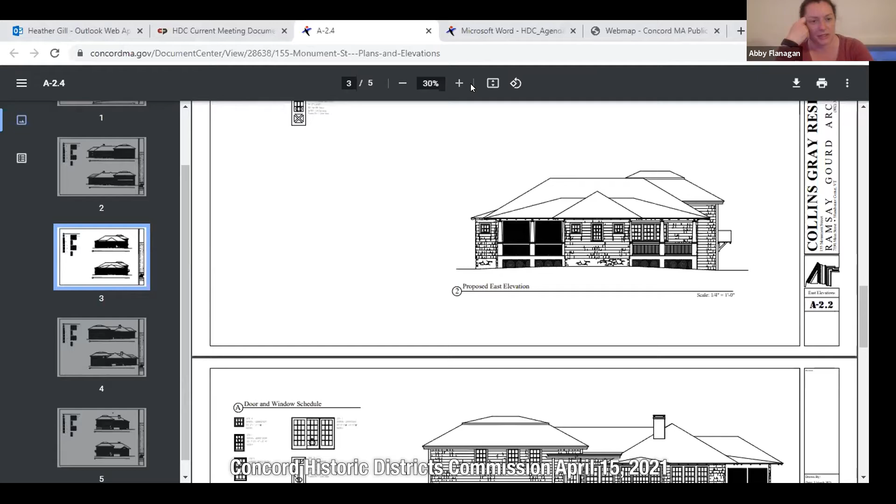Thank you, Luis. Abigail: Heather, could you just pull up the cut sheets on the exterior light fixtures, the one by the front door and the one between the garage doors? I just wanted to double check. Yeah, so they're dark sky compliant. Do you know the wattage and the kelvins on these?

Does it say it on the sheet that I included? There is not one by the front door. Oh, there's no light fixture there. I thought there was, but there's no light fixture. So the only exterior light fixture being added is between the garage doors. And I think there's a recessed one in the porch, recessed in the ceiling above the door to the garage and the front door.

No, there won't be any in the roof. Are you talking about the roof line over the garage doors? No, there won't be any there, just that one light. And you're removing the floodlights that are currently there?

We'll probably replace them with something a little smaller, but we would probably need to light up the driveway in the back. So I would just ask that whatever fixture you choose to replace, since you have an existing floodlight, you're entitled to replace it in kind. I would just ask that you submit that fixture to Heather, and that it's of no greater wattage than what's currently there. Yeah, definitely.

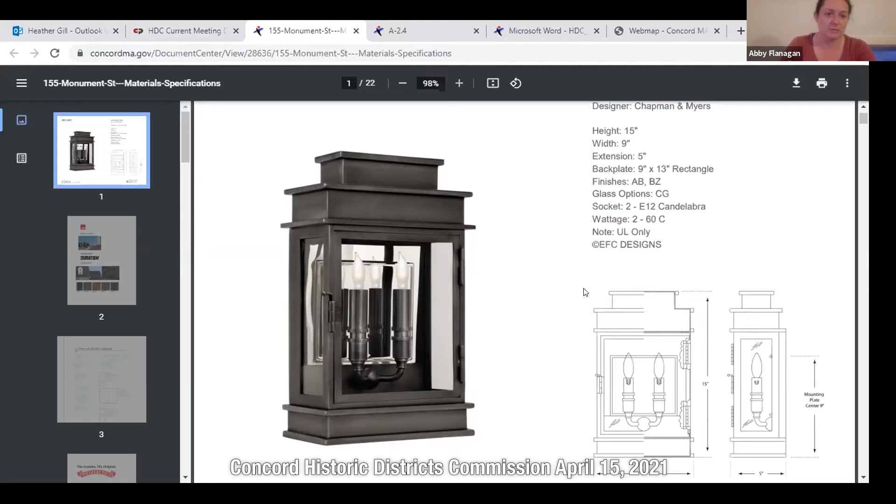Other than that, I didn't have any issue with the application. I think it's appropriate, in keeping with the architectural style of the house. I think it'll be an improvement, make it more cohesive. So I'm happy to support the application. Oh, thank you, Abby.

Melinda, I am in agreement. I like the design. I look forward to seeing it implemented. I think you'll love it when it's done, and I have no objections at all. Thank you, Melinda.

Catherine, I see you've joined us. Welcome. Thank you. Any thoughts, comments? It was a great site visit, and I really appreciated being able to look at not only the elevations, but the details.

Like the fact that the molding trim around the windows will be replicated, that original trim, which was a nice detail. So thank you for pointing that out. And I agree with my fellow commissioners. I think the improvements are going to be excellent, and will ultimately make the house feel much more cohesive and integrated. I think it looks great.

Thank you, Catherine. Kate, I see you there. I know you weren't able to join us this morning. Do you have any thoughts about the application?

Yeah, I mean, I did go by later on, but I'm familiar with the property, I go past it a lot. And I think I agree with my commissioners, these revisions look great. I know you've spent a lot of time on this, Martha, and we appreciate where you've taken it to, it's going to look really good. Thank you, we will make it as beautiful as possible.

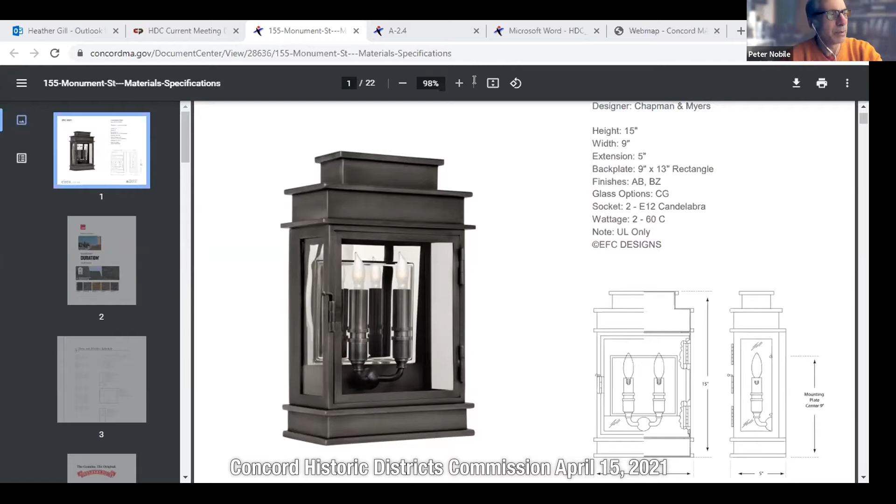Okay, thank you. I think we can at this point open it up to public comment. Is there any public comment on the proposed work at 155 Monument Street? I'm gonna look around, I can't see everybody here. Heather, do you see any raised hands? Don't see any, I see a lot of tumbleweeds.

All right, so let's bring it back to the commission, and I would look for a motion, please. I move that we approve the application of 155 Monument Street: restore the original open porch at the front entrance, remove gutters, replace the front steps, replace windows, replace garage door, replace the front and back doors, paint the house, with the caveat that the utilities on the south facade of the house will be covered with vegetation, and that the wattage of the light fixtures will not exceed what currently exists.

Can I get a second on that? Melinda, you second? A second. All right, I'll go around, all in favor, let me just go in reverse order. Kate, yes, you're an aye. Catherine, aye. Dennis, aye. Luis, aye. Abigail, aye. Melinda, aye. And I'm an aye as well. So it's unanimously approved, and Martha, you're good to go.

Thank you so much. You're welcome, and good luck with the work. We'll look forward to seeing it. Awesome, thank you.

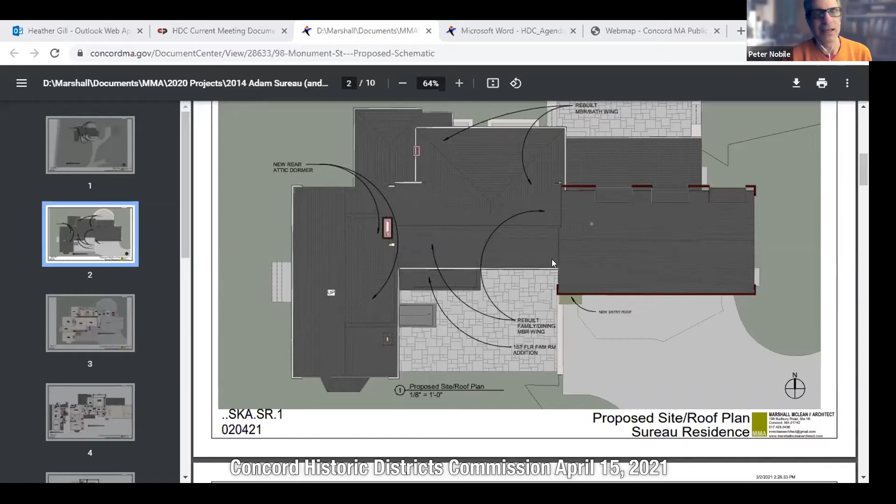Sure. So, Heather, if you wouldn't mind putting up the proposed schematic. There you go. And maybe if you could scroll down to the 3D model views, because that's what we were looking at in the courtyard. I'd keep going, if you wouldn't mind, down to there.

All right, so why don't I go around by commissioner again and see if there's any particular comment. One thing I would say, starting off, I looked at these later and I was pleased to recognize that the roof, the top of the ridge of the center section, actually does land below the ridge of the front of the house. I was a little worried that was going to be different, and so my one fear was erased. So let me start with Melinda.

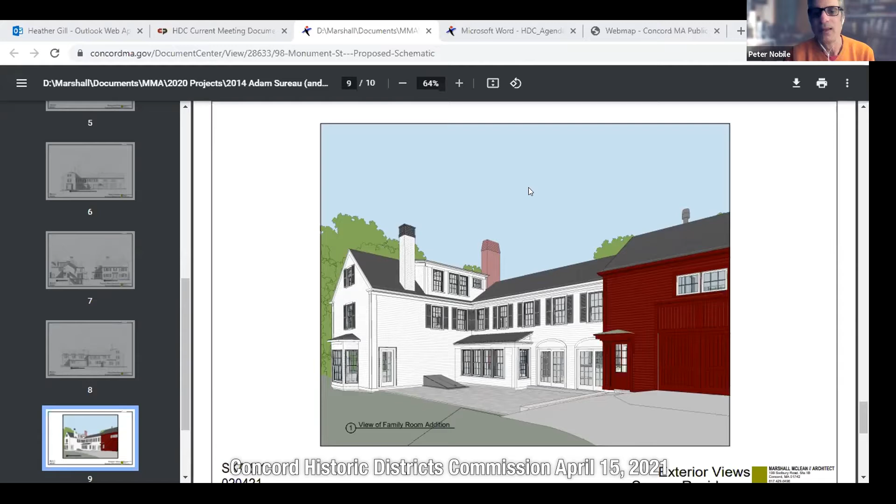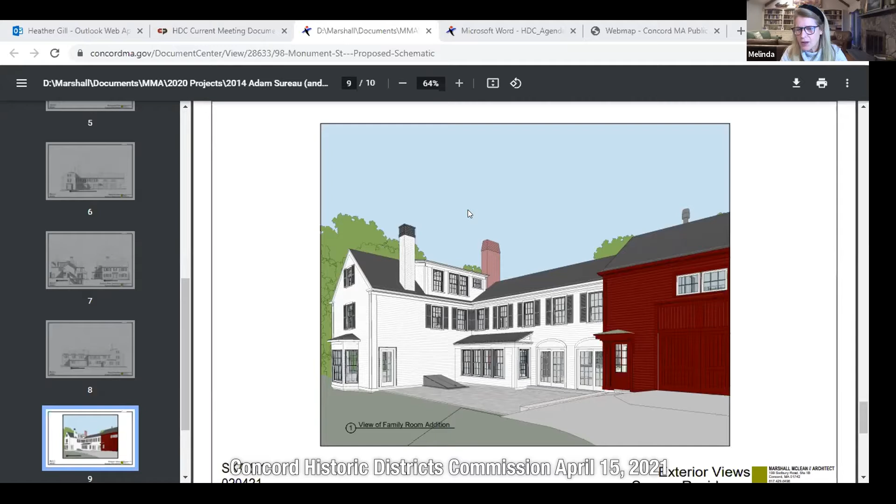Okay, so everything was fine to me until the very end, when I guess I wasn't sure what they meant by this, but are there 2 chimneys or 3 chimneys on this house? There are 3. There are 2 that you see in this view here, and there's a third on the back side.

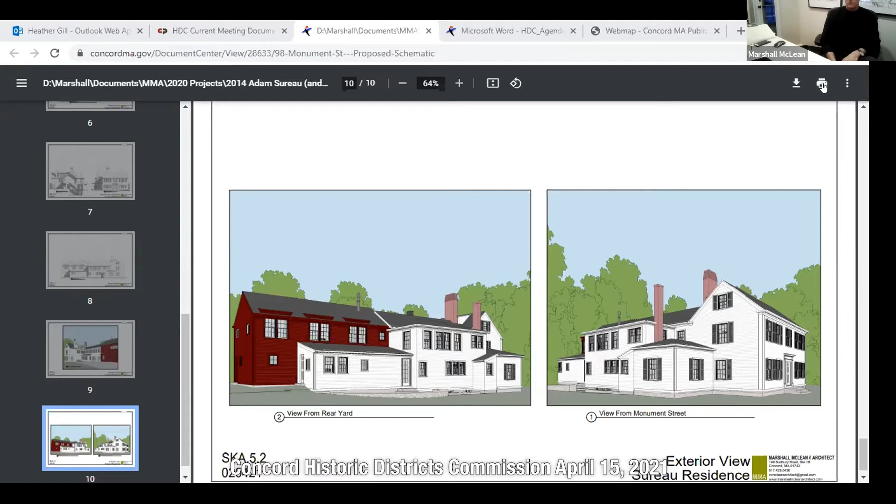And the one on the other side is the one that, when you said you would try and save it. Well, we will do our best to save it. That whole wing it's built next to, that 2-story master bedroom wing, is coming down. The intent is to save it.

If it gets damaged in the process, I intend to just replicate what was there, so it's not going away. Yes, because it feeds a working fireplace in our office. I see, okay, that's the only question I had.

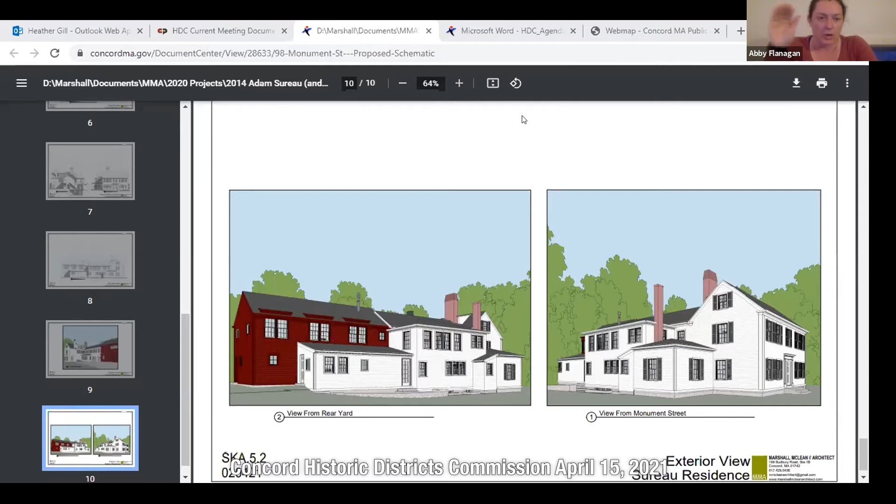Thank you, Melinda. Abigail. So that was one of my questions. On the courtyard side, you have one roof that's being built over the door to the garage, not the garage doors, but the door to the garage. Correct. I assume there's a recessed light in that?

There is a lamp that's not in the drawing to the right of that door that's currently there that can remain there during this process. Okay, are there any other cut sheets for exterior lights or anything like that? Is there any other change to exterior lighting being made? The intent is to save and reinstall the fixtures. And there's a fixture between the 2 sliders that's kind of a jelly jar with a little shade over the top.

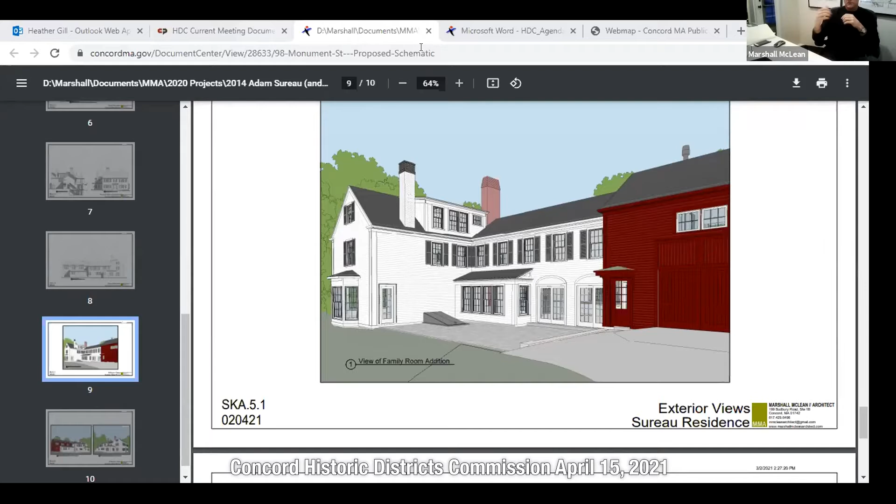Black thing, I could show you. I have a photograph if you would like to see it. I could share my screen. But those are just remaining, you're not... Yes, but we'll take them down and we'll put them back up. You can see it right there in the photographs, right?

Okay, and there's one at the corner of the house by the lone door, by the bay window. That will just be removed, thrown in the garage during construction, and put back on. So those are the only exterior lights. Actually, that one doesn't need to be removed, I apologize, because that's not getting touched over there.

Okay, so then my other concern, the site visit was very helpful. I think it clarified the roof lines for me, which I had originally had a concern with, like Peter, that it was going to be higher, more visible, so that concern was allayed. I do have a concern about the windows, particularly, and Dennis is our window expert, so I will defer to him. But my particular area of concern is the windows on the study, on the original part of the home.

Those large, long windows that have kind of slightly wavy glass—I know your intent is to replace most of the windows for efficiency's sake, which I understand. We have old single pane windows in our house, and it is at times breezy because of that. My preference for those windows, particularly those long ones that appear much older than some of the other replacement windows on the house, would be that they be restored rather than replaced.

I remember in the last meeting you talked about ways to insulate around the window and improvements that can be made, and that's fine. Dennis can speak to this, but restoration companies can make these, particularly those of such an unusual size and shape with such interesting glass, incredibly tight and more efficient. So my preference would be that those windows be restored.

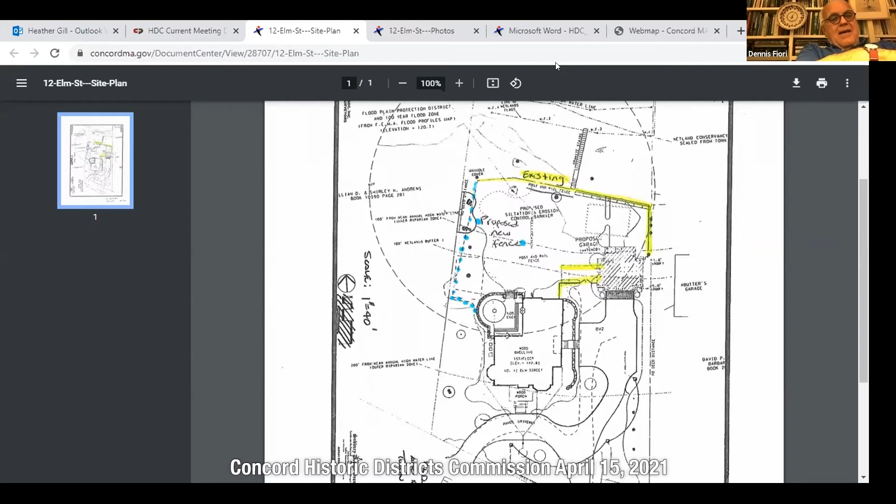Let me open this up to public comment. Any public comment on the fencing project at 12 Elm Street?

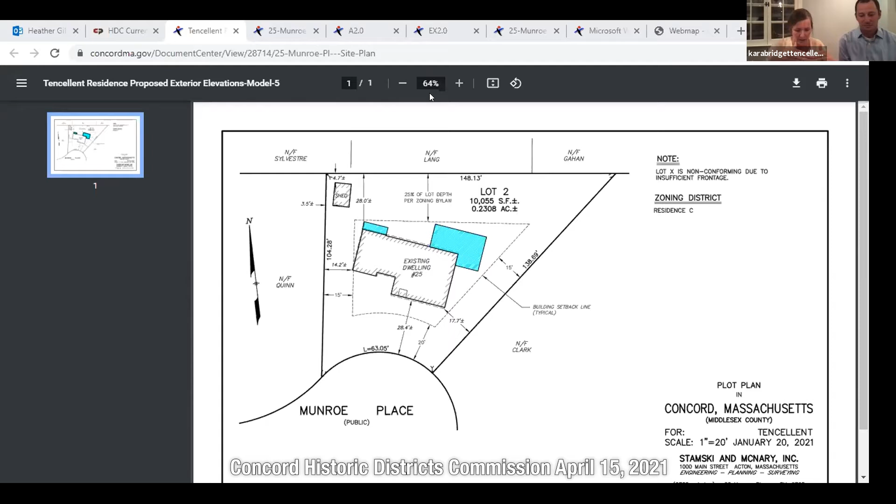There were some plans, I think you have those as well, but everything we're proposing is within the setbacks and the square footage allowance for our lot, as well as all in line with existing exterior finishes, door style of the house presently, in the style of the area.

So we're proposing some windows on the left side of the house to maintain that living space. We're not going to convert it back to a garage—we'd like to maintain the living space there. So what we'd like to do is put some office space, some windows in that playroom space, relocate the bathroom and laundry room to the back of that space, and then open up that mudroom area so we have a direct path and access to our back garden.

And then we would like to put the screened porch on the right-hand side. We don't have an existing deck or patio or anything in the backyard presently, so we'd like to be able to put something out there that allows us to enjoy the space more in our back garden.

And so that's the floor plan. So the elevations just show—there's a little doghouse dormer that shows over the side door right there, which is our main entry. We are actually not going to proceed with that; we're going to just leave the roof line as it is right now.

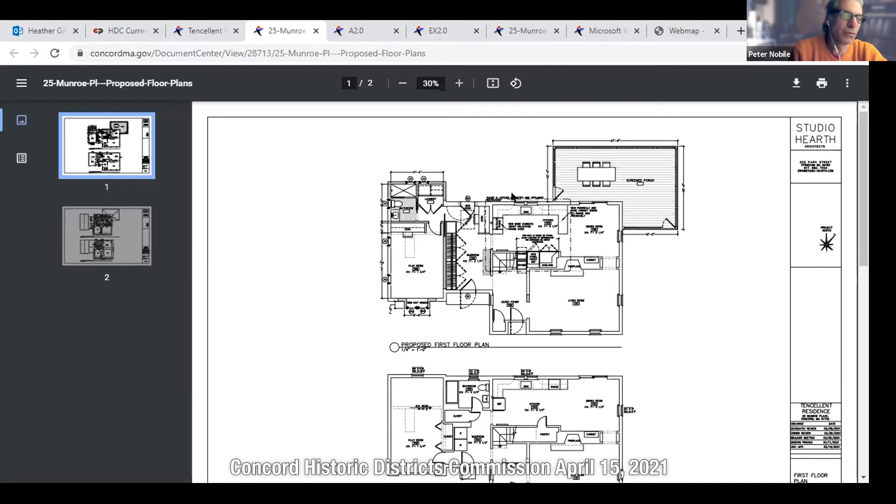So can I see the drawing again? Where's that bump out? It's on the back, it's not visible. So the bump out is invisible from the road at all, right? So we're not concerned with the bump out, correct? No, but the screen porch is new. And the bump out is where the boiler is going to go, that's the whole boiler thing, right? Right, yeah.

So what I'm understanding is we need to really only approve the porch and the bay window, correct? Is that all that's on there? Yeah, and the front door. But you could move ahead with doing the other renovation without us, correct?

Well, I suppose, I don't know. We were told yes, you can. You don't have to worry, you definitely can. We can't see it, I don't know why you can't move ahead doing it. Okay, so it's the window, the bay window, the door, and the porch.

It would be these windows on the west elevation also, correct? Because those are sort of visible from the road, depending on how you're coming. But you'd have to be really looking - I don't know what you're... That's all sort of cosmetic stuff, correct? Yeah, it's not changing the massing, it's not doing... so I don't know.

Anyway, well, so let's do this - we're going to do a little bit out of character. I think we typically would just discuss this a little bit tonight and then hold off questions to the site meeting. But given that, what I'd frankly like to do is a kind of conditional approval.

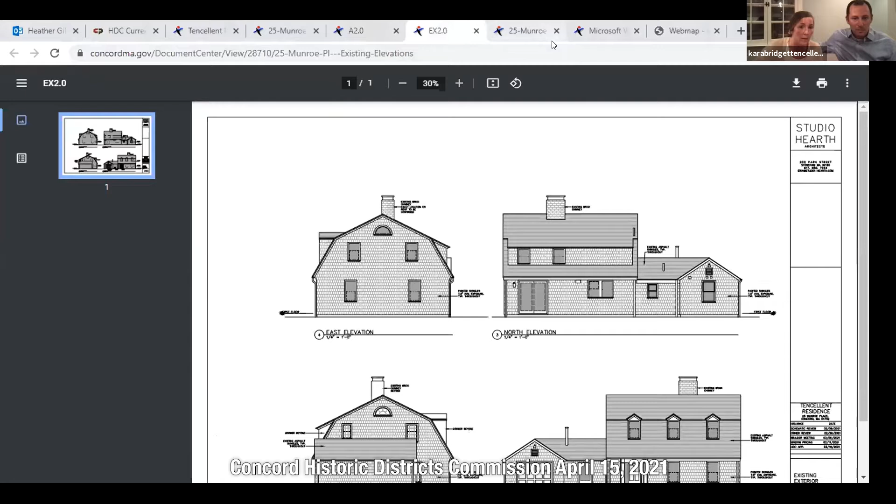All right, so I think I have a pretty good understanding of the design. My only question, and I can't say I've memorized the packet, is whether all the windows are specified. They should be keeping in line with the existing windows. So we have wooden, original windows, original to the house. They're double hung, single pane.

But you would probably do insulated glass, correct? Yeah, I think that was in the application. I see, that's the one thing I don't see. It says proposed windows, but we don't have specs on the windows, simulated or insulated. Okay, we may need to follow up with a few things like that, the cut sheet for the window.

I think the screen porch, the screen material itself, the sample, matching existing in a lot of cases. Concrete foundations, siding and trim match existing. We'd probably want color chips, unless it's just matching existing. It's just matching existing, all matching existing. Okay, then we don't really need the color chips.

The screen porch design was actually taken from the house that abuts our yard at 45 Lang Street. So that screen porch they have is similar to the one we are looking to put on the back. And I'm trying to think what else is visible from the public way: windows, doors, the chimney's going to be repaired or rebuilt, or not even touched. Chimney's not touched, and nothing on the main part of the body of the house.

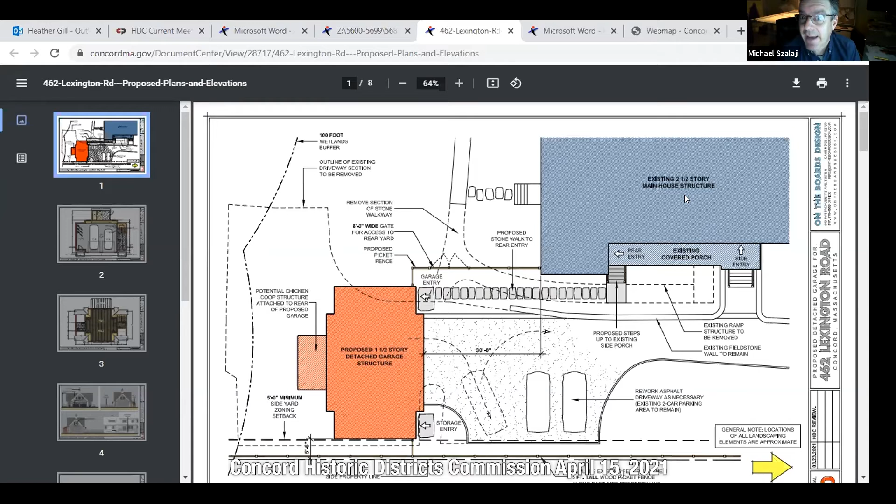The second part of the project is replacing some fencing along the east property line. Currently it's a 6-foot solid fence, and we're proposing a 5-foot tall, more traditionally designed picket fence. That picket fence would also be added connecting the new garage structure to the existing house structure, and the same design would wrap around the west side of the property, shown a bit better in a drawing, creating an enclosed backyard space for the family.

The third part of the project is removing an existing accessible ramp, shown on sheet A3. The bottom drawing shows on the left the proposed detached garage, and on the right the back side of the existing house, which currently has a side entrance and a covered porch connecting that side entrance to a rear wing that was modified back in 2017.

And a ramp was added, I believe, a few years ago for accessibility. We're proposing removing that ramp. It's no longer needed. The covered connected porch structure would remain, as well as all the details of the railing. So it's essentially just taking the handicap accessible ramp out. So those are the 3 primary objectives of this project.

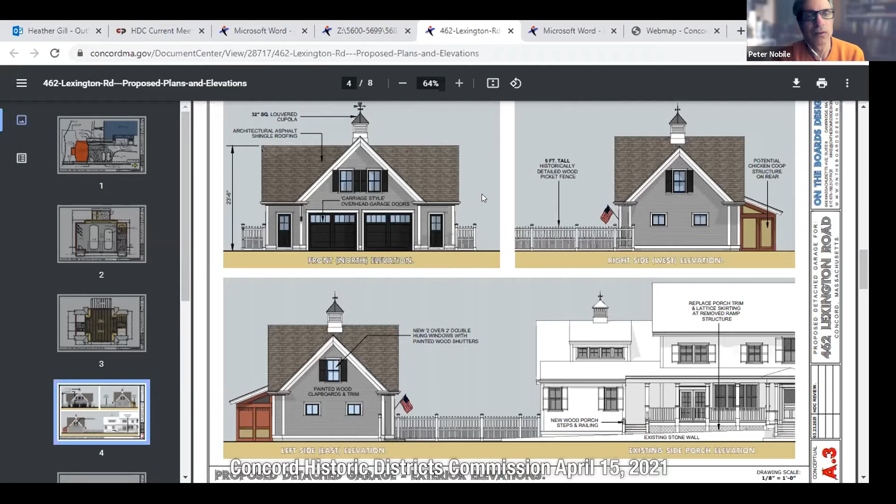Thank you, Michael. Heather, could you scroll down to the 3D views? Those are, I think, the last few drawings. There you go. So there's a view of the drive, looking down the driveway. There's a different view. And the last one is a kind of a nice overview.

Okay, so we're looking at minor modifications to the house, and essentially so there's no other work on the house itself. Correct. There's some interior renovations that are going on. There's not any changes to the exterior that I'm aware of. Gotcha, okay.

Now, again, I'm going to just go back to the earlier conversation. So our next meeting, typically we would want to do a site visit, but it's several weeks away. Is that going to cause a problem, or can the homeowners wait that long? The answer is maybe, and maybe not.

Our main goal is just to have the garage ready by snowfall, next winter. We are approaching the period of time that could make that somewhat difficult. I also am likely going to use the area above the garage as my home office. The pandemic has taught me that working at home with 3 small children and some dogs is not the easiest of tasks.

But we can work with it. The answer is maybe. I think we've also found finding materials and everything else in a time frame that's maybe similar to historic times has been a little bit more challenging than we expected. Our initial fence quote, I can assure you, was nothing short of disturbing.

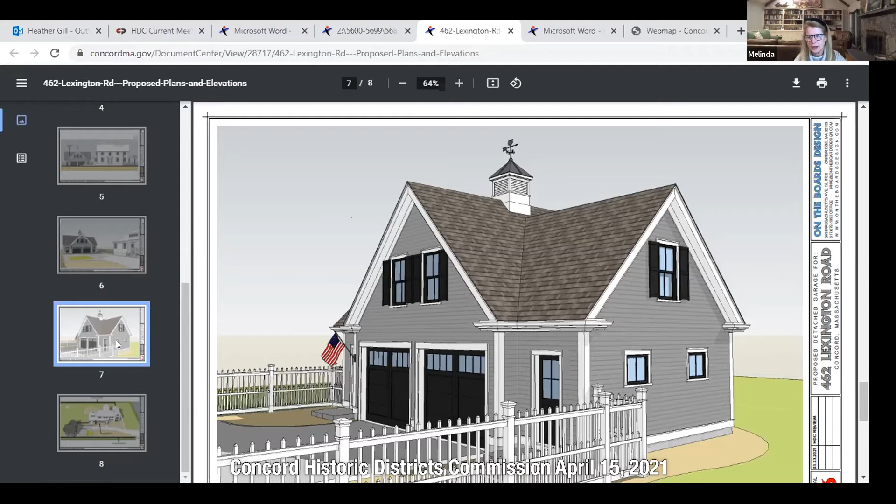I have to say I love the fence. Maybe Emerson's getting a percentage. And I like the fact that you're going to reduce the driveway, because that great big long driveway is not so great. I don't know what you're going to use coming up, but you can tell us about that more, I'm sure. But I do want to see the size marked on the property of the garage. Okay, thank you, Melinda. Thank you.

Abigail. Yeah, so I think everybody's going to be, well, dangerous speaking for everybody, I think everyone's going to be in favor of the handicap ramp removal. That just seems like a no-brainer, and the restoration of that porch.

Likewise, it's a lot of fencing, but I think the style, the openness, and the reduction in height is an improvement. I have toddlers, I have dogs, I understand you need a fenced yard. We have 4 dogs and 3 kids. I totally understand.

But it is a lot of fencing, and we don't typically see fully enclosed fenced yards. So on site it'll be interesting to see how that appears, but I understand the functionality and the need of it. You'll get a feel too, like now that we've been living here for a little while, we're seeing people just come on the property and they're not sure. I think the style of the fence is attractive.

And likewise, accessory buildings, it's nice that it's a 2-car garage. We always have a preference for 2-car garages as opposed to 3-car garages. I think the style of it is complementary to the house. When we're on site looking at scale and massing and sizes is what we're going to be concerned with, so having it mapped out is really helpful.

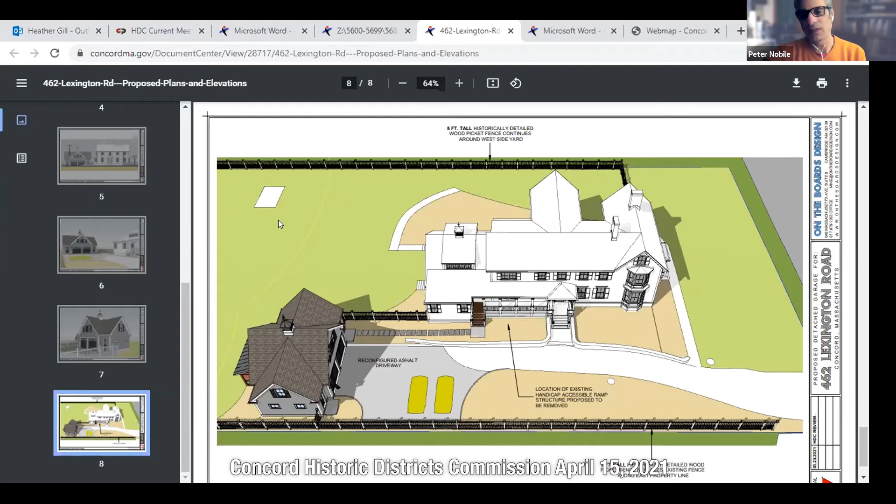We're on the same page. I think that we want to make sure it's not a monster, not something problematic. I think one of the things we often say is that it's subservient to the main house - that's probably not a very good use of that word these days.

Abby, just so you know, the fence that abuts 478 already exists there, and it's a slightly larger fence, so we'd likely be proposing something a little bit shorter. It does run the entire length of the property as well - it's falling down too. Thank you, Abigail.

Luis, I'm going to skip you because you've recused yourself.

Dennis. At this point I don't have any comments, any thoughts - I think it's been covered by everybody else. So I'm just going to wait for the site visit and see how that goes.

I am curious though - I know the last time we met with you, you said you were thinking of leaving the sign up as an artifact, but I noticed you've taken it down. Well, no, actually we have not taken it down. I saw it down last time I went by. It is, unfortunately, there is some contention - the prior owners stole the sign. Stole it, actually.

If the historical commission would care to be involved. No, thank you - it's in legal, we're legally trying to get... no, we got our own controversies. Sorry I mentioned it.

It's okay, so our goal is to have it returned. Our goal, I mean, again, I think we really tried to be consistent from the outset - our goal is to restore some of the beauty of the home, make sure the property is kept up and beautiful and adds to everything I think you guys are all aiming for. So I think we're all completely aligned.

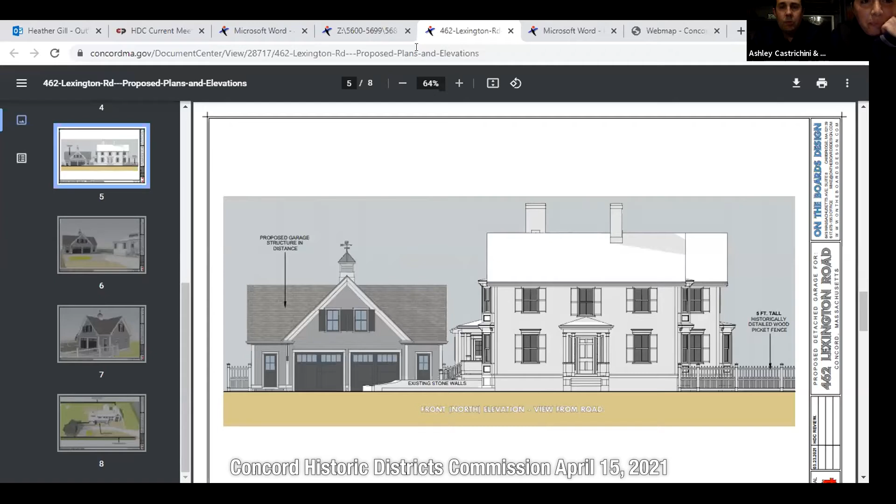Is there a way - I know that we were talking about for the other family of doing something at 6 o'clock that day. No, there's not, they're not. Oh, there's no. Okay, oh, your face. It's a long time. It's like, but okay. Yeah, it is a long time. I think the problem is having an earlier meeting is another public meeting. Okay.

Heather, we didn't really discuss that all the way through. If we had a 1 hour meeting, what happens when we cut it short? If you can't come up with a decision and vote by 6:59, you would need to continue it till May 20th. But if there were other applications, would anybody else be on that docket? No, we took it off the schedule on the website, so we got no applications for it. So it would just be this.

Well, if it's just one project, can I look around and see if the commissioners would be willing to meet that day? What's the day again? May 6th, I think.

I have a question, just curiously, about the process. So if a site meeting is done, is it done prior to the evening meeting? So it's a daytime site visit, same day? That's correct, typically at 8 or 8:30 in the morning. Got it, we'd come visit the site, we can't really discuss it, it's not a public meeting. Technically we'd ask questions, and then that evening we would meet.

So I guess the question is, is the commission willing to meet on May 6th in the morning and then at 6 o'clock? I'm fine with trying that at 6 p.m. Sorry, that's fine. We're not going to run afoul of notice periods or anything, that we've got plenty of time to notice it, change the website, public notice, all the rest of it. Yeah, because we don't have to run legal ads or anything for a continuance. Okay, I don't have any objection to it as long as we're not gonna run afoul of the rules.

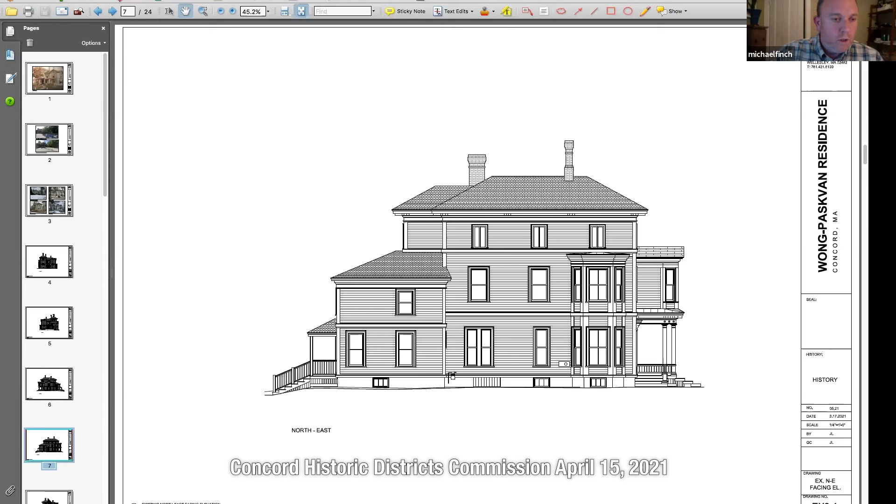And this is the left-hand side, which is where the existing parking court is. So we are proposing, as you face the house from the street, on the left-hand side, a two-car garage, really trying to grab the architectural language of that Italianate architecture and bring it through to the garage itself, while still giving it kind of a carriage house feel.

We've added a cupola on top, and you can see this low one-story mudroom connector. This actually sits about 4 risers below the main first floor elevation of the house. So within the house you'd step down a couple of levels to that mudroom, and then from the mudroom down into the garage it's a couple more risers. There's really a setback to minimize the height of this piece, so it sits down below the first floor level.

If we look back to that historic photo of the house, the original house had shutters pretty much all the way around. This is one thing we're thinking about potentially bringing back to the house, adding to all of the existing window locations, as well as the new windows being added to the second floor addition and the first floor family room addition at the back.

Currently, this front porch is in a great state of disrepair, so part of what we'd like to do is restore this porch back. There's a very tall, highly overgrown hedge that sits right in front of the porch, which has caused it to rot out pretty significantly for most of the porch.

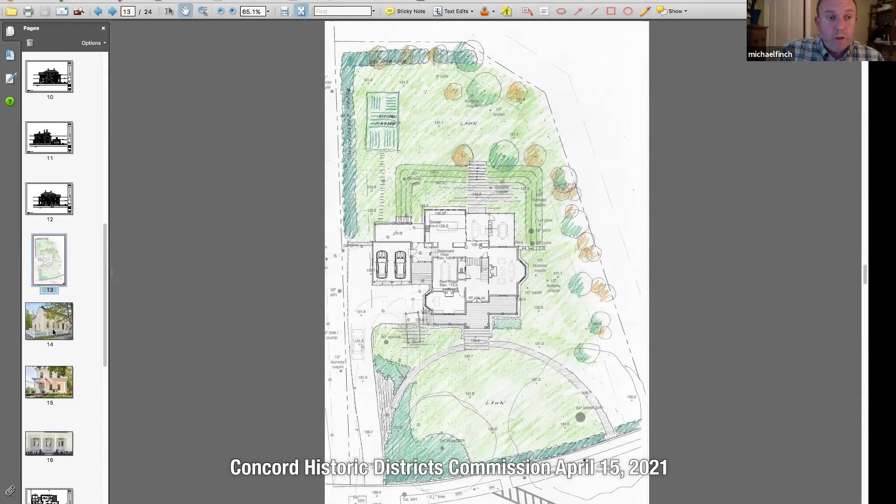We'd love to get the commission's feedback and guidance on the proposed addition of the garage, primarily thinking about these colors and the potential addition of bringing the shutters back to the house, along with some of the other restoration elements we're proposing.

Peter, before you provide your feedback, one thing I'm curious to hear about is the shutters. When you look at an older Italianate house and the proportions of the windows, a house of that period tended to have single independent windows—they were not doubled or tripled up. I think our efforts to be sensitive to the history of the house can also lead to conditions which are sometimes complicated.

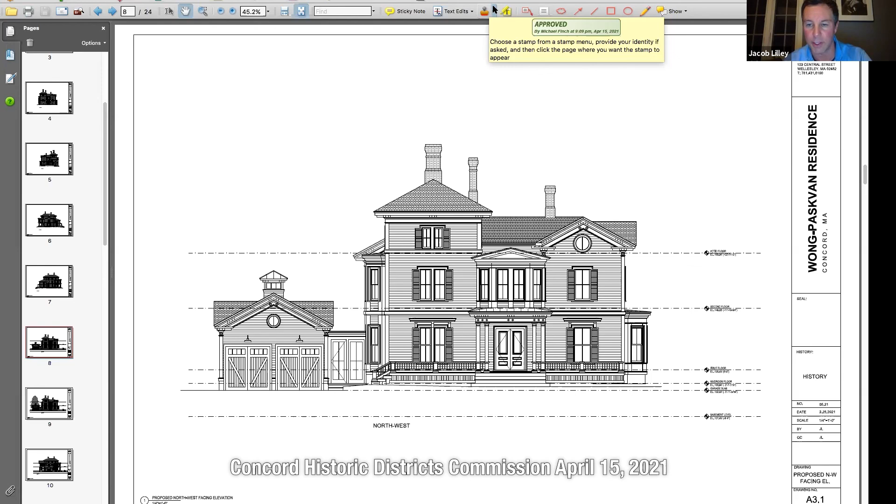All right, and I think our last bit of other business here is the Bell Park. This is a discussion to potentially install a drinking water fountain.

And somebody's been waiting patiently this whole time. Is that you, Melissa? Have you been waiting in the background there the whole time? I have been. I've been learning a lot, but I think Chris Carmody from the town manager's office is going to lead us through the discussion, and I'm purely here for support and learning. Okay, well, welcome to both of you.

So why don't you tell us, we were just trying to guess what this is going to look like. So tell us what you're thinking.